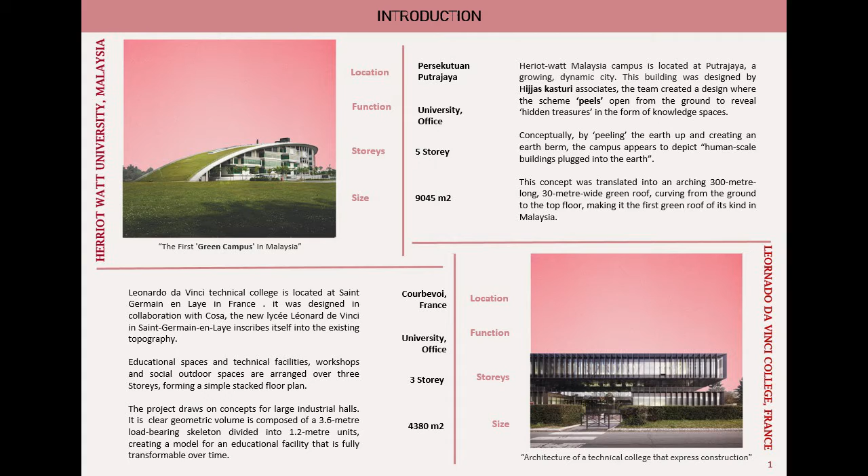Secondly is Leonardo da Vinci Technical College, located in Paris Saint-Germain, France with a temperate oceanic climate. It was designed in collaboration with COSA. The new Leonardo da Vinci in Saint-Germain inscribes itself into the existing topography and the architecture of the technical college that expresses constructions in mind.

Moving forward, I'll talk about the site planning analysis on the two buildings. The site planning analysis is based on the climatic analysis in their respective locations and how they utilize or avoid it. Firstly is the climatic analysis for Heriot-Watt University, having a tropical rainforest climate with an average 32 Celsius temperature all year round and an average 2,960 mm of rainfall per year. It is hot and humid throughout the year, peaking in May, with two monsoon seasons, May to September and October to March.

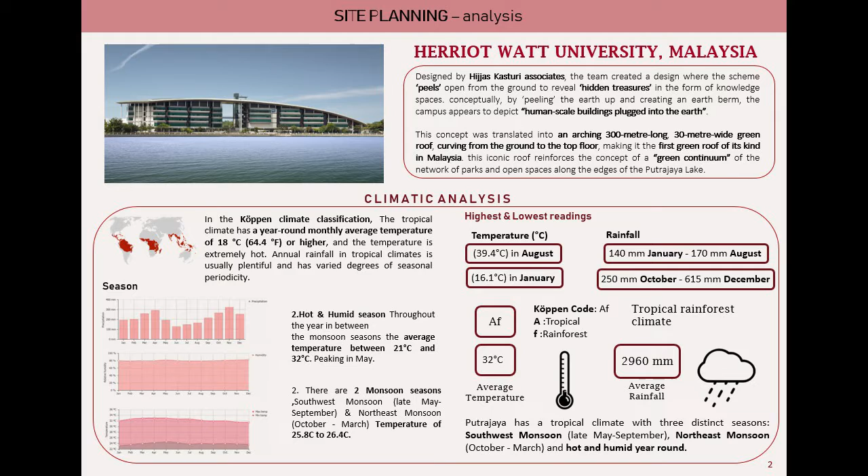An analysis of the site shows the building is responding to the solar radiation and sun glare at different times of the day, creating a systematic orientation where several clusters or spaces are divided to allow permeability and ventilation to pass through. For the solar response, the building is set into the topography to minimize the sun glare and direct heat gain, with placement of windows facing the north and south acting as a focal point and away from direct sunlight. They have also passively designed the facade orientation to allow enough light to penetrate through.

Next is the wind analysis. With prevailing winds very prominent from the south, the spatial planning of the building is oriented to maximize efficient ventilation, allowing as much wind as possible to pass through the building.

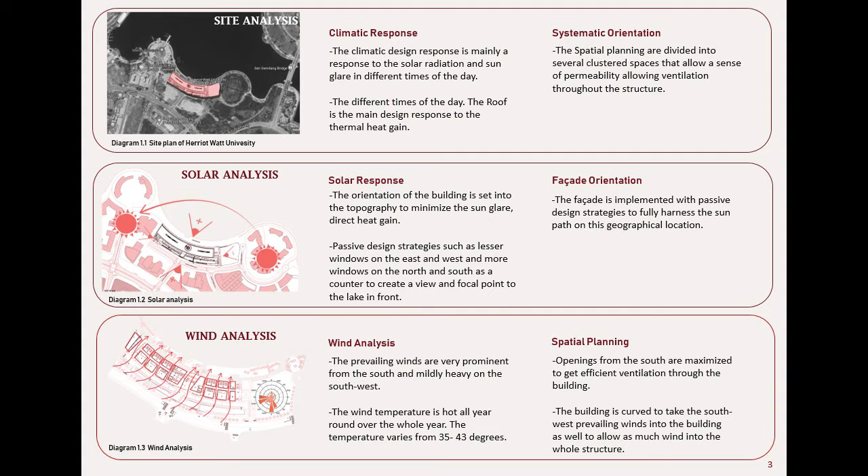Moving forward is the site planning analysis of Leonardo da Vinci Technical College, located in Paris Saint-Germain, France with a temperate oceanic climate, averaging temperatures of 22 Celsius and an annual rainfall of 99.2 mm. The climate generally features mild summers and cool but not cold winters. There are four seasons, with sunny weather in spring, March to May, and summer, June to August, with average temperatures between 26 Celsius and 39.4 Celsius. Chill weather is in autumn, September to December, and winter, January to February, with temperatures reaching as low as 16.1 Celsius.

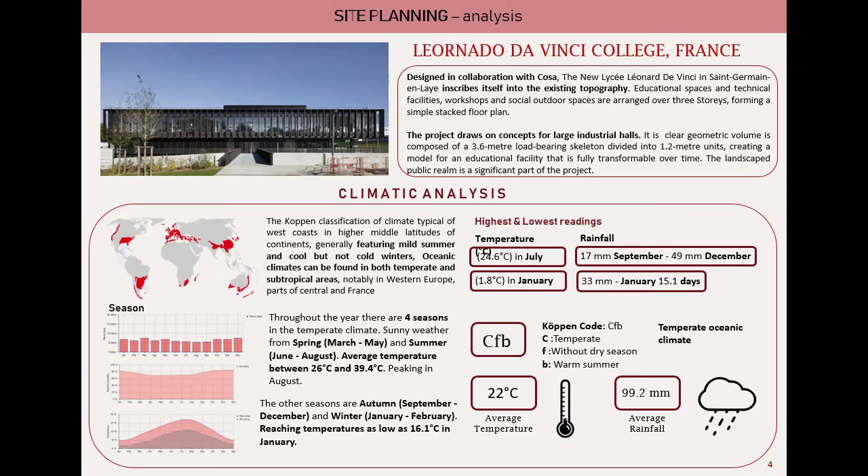The building is oriented in a way where it has to protect itself from the summer sun radiation and harness the winter sun efficiently to provide a comfortable environment where the students can study with natural sunlight and well ventilated areas. As for the solar response, the building is divided into floor segments having courtyards and openings allowing natural light. The facade is oriented so that each of the educational spaces, technical facilities, workshops, and social outdoor spaces gets plenty of sunlight, either reducing the summer heat or harnessing the winter sun for heat efficiently.

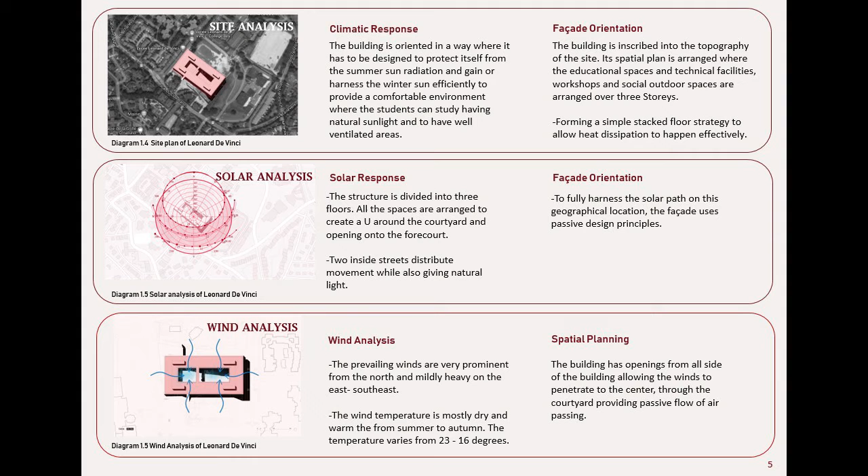Next is the prevailing winds that come from the north and mildly heavy on the east-southeast, and are mostly dry and warm. The building has openings from all sides, allowing the winds to penetrate to the center through the courtyards, providing passive flow of air.

Finally, we can compare the two buildings. Firstly is Heriot-Watt University. The architect has taken into consideration the overwhelming heat from the sun. The open facades of the building face the north and south, reducing the thermal heat and sun glare while providing enough sunlight to illuminate the spaces in the university. As for the user experience, the university mainly uses active cooling in each of the spaces, in combination with how the open facades in each space are oriented to avoid the intense heat into the rooms, creating an overall comfortable environment.

Secondly is Leonardo da Vinci Technical College. The amount of west-facing windows isn't overwhelming and they're well shaded to keep things cool. The light shines brightest on west-facing walls during the hottest part of the day, and the building is oriented to bring in winter sun while keeping out the hot summer rays. As for the user experience, the students are provided with a comfortable environment for studies due to plenty of light penetration into the classrooms and harnessing the available heat from the sun during winter.

In conclusion, the two educational buildings have different methods and reasons for their site planning based on their climatic advantages and disadvantages. Heriot-Watt University is oriented to minimize heat gain from the sun, forming stack spaces to allow continuous wind flow through the building. Leonardo da Vinci Technical College is oriented to gain heat from the sun in winter and protect the spaces from the summer heat while still allowing plenty of illumination in the spaces.

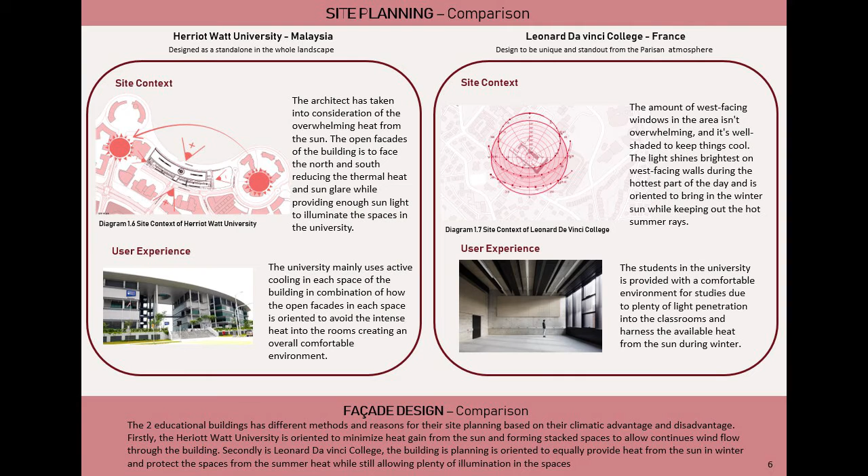For daylighting, the Heriot-Watt University is oriented towards north and south, allowing less direct solar radiation towards the building envelope and reducing the heat build-up in the building. There are various passive design strategies incorporated by the university, such as using the light well and skylight to bring in natural light into the interior of the building.

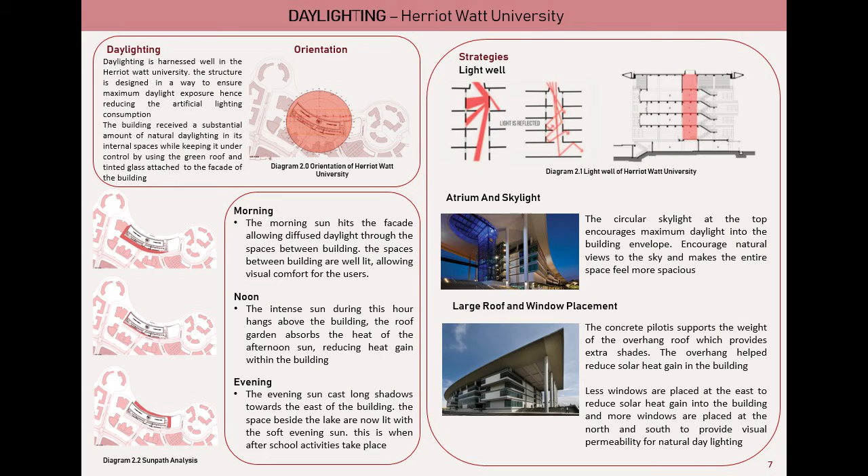By using the light well, they can reduce the electric lighting requirements of the building, as well as provide an open space that can be used as an outdoor area. The building also uses a large green roof to provide extra shade and help reduce solar heat gain of the building, and it is also used as a rainwater buffer, purifies the air, reduces ambient temperature, regulates the indoor temperature, saves energy, and encourages biodiversity in the city.

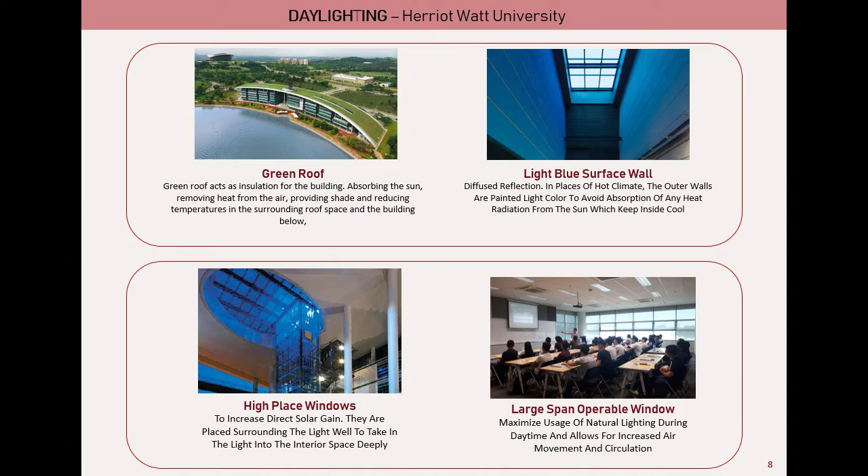Lastly, this building has a lot of large span operable windows that help maximize usage of natural lighting during daytime and allow the users to work and continue their activities productively. Next, the Leonardo da Vinci Technical College is oriented towards the northwest and southeast to ensure maximum daylight exposure, hence reducing artificial lighting consumption.

This university incorporates multiple passive design strategies. This includes dark color exterior facades, blades and louvers to invite soft diffuse lighting into the building as well as to reduce glare that could affect the visual comfort of the occupants. A light color building interior helps to capture sunlight within the building so that the spaces are well lit during the day.

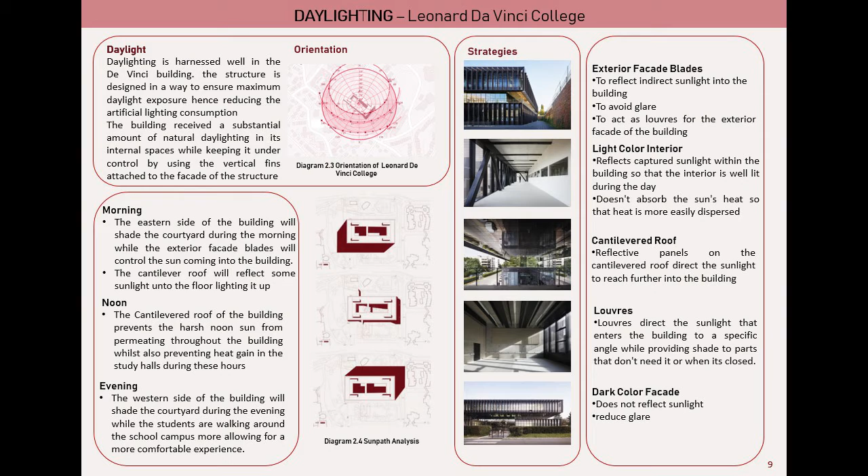Other than that, this building uses a large cantilevered roof with reflective panels attached to it to invite more sunlight to reach further into the building, brighten up the interior spaces and allow users to work effectively.

Finally, if we compare the two, Heriot-Watt University is located in a tropical climate with strong sunshine throughout the year. Hence, the design focuses more on diffusing the sunlight. This is to ensure that the building obtains maximum natural lighting while also ensuring the spaces do not heat up. On the other hand, Leonardo da Vinci Technical College is located in a temperate climate, so the design focuses on maximizing natural sunlight as there is not much solar radiance.

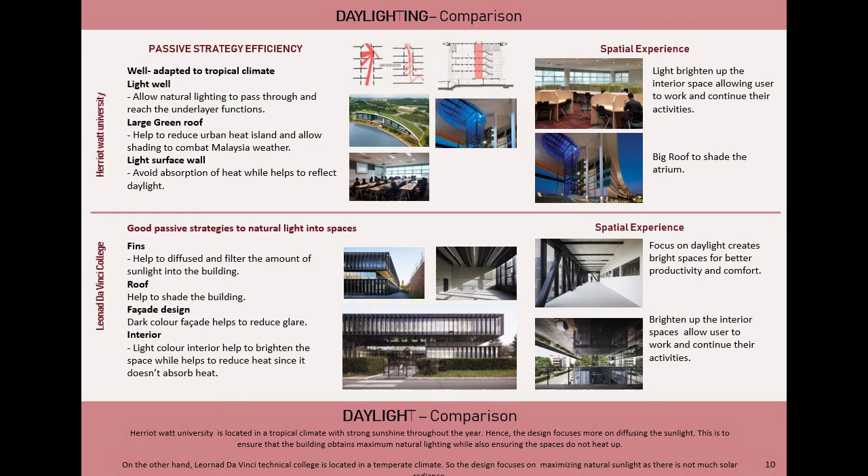Now, if we move into the facade design analysis of each building, firstly is Heriot-Watt, where for the facade orientation, the building is positioned in front of the lake for passive cooling. Windows are also fewer on the east and west sides of the building. Furthermore, the building takes on the form of the curvature of the waterfront, as there are more openings facing north and south towards the lake for vistas and cooling purposes.

The building envelope consists mainly of raw precast concrete columns, and the walls make up the structural facade, whereby the columns are used as a support for the overall structure. White coat paint is used to lower the heat absorption within the building. Precast concrete walls are also used to have a modular system as they are arranged on the site.

Moreover, the concrete provides good thermal insulation in a hot tropical climate, which moves us into the thermal insulation of the building, where there are open spaces to allow heat transfer during the night. And the green roof is a catalyst, as during the day the sun's heat is trapped in the roof facade, and at night the trapped heat in the green roof and walls is released into the environment.

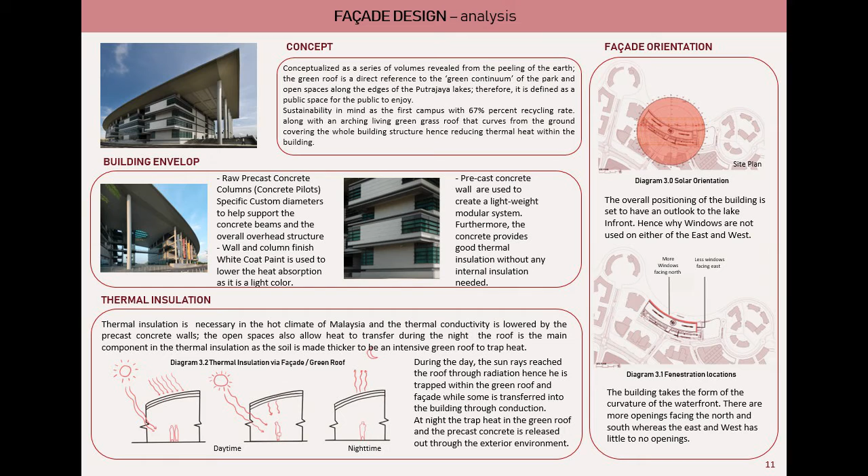Aluminium frame walls are used as a fenestration system to maximize the area coverage to let in as much light as possible. Low-E tinted glass is used in the curtain walls as it reduces the amount of heat loss by reflecting heat energy. So if you look into the facade design, the fenestration orientation is that the curtain walls are maximized on the north and south and less on the east and west.

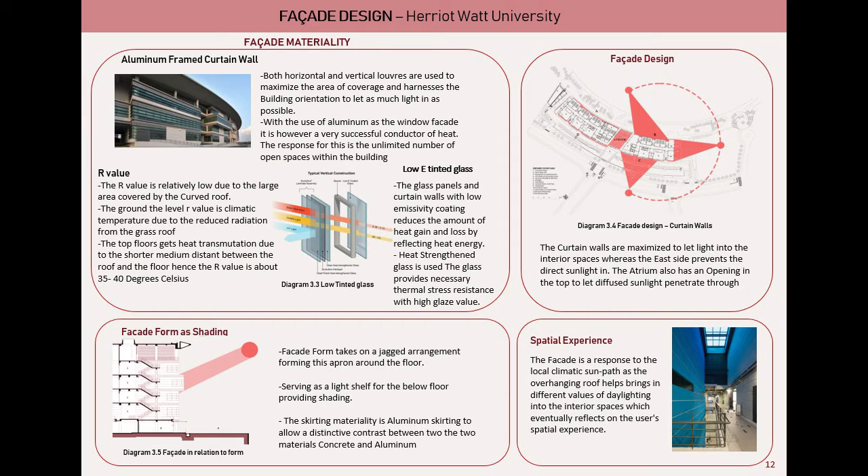The atrium on the roof allows diffuse sunlight to pass into the open space in the middle. The overall building design form takes a jagged arrangement in the modular form, as the upper floor acts as a shading system for the floor below in the form of a building apron.

Looking into the Leonardo da Vinci College, the college takes an open glazed facade concept and diffuses sunlight into the secondary spaces while avoiding direct sunlight, which is why the need for active daylighting is reduced greatly.

Looking into the building envelope, the components that make up the facade are the exterior facade, blades to cast shade from the sun's rays at various angles, narrow maintenance balconies on the upper floor, and reinforced tall glass in the basement level. A steel-framed exposed exoskeleton is used as a rigid form to create a uniform distribution of the facade openings, giving a repetitive system for genuine modular flexibility as well.

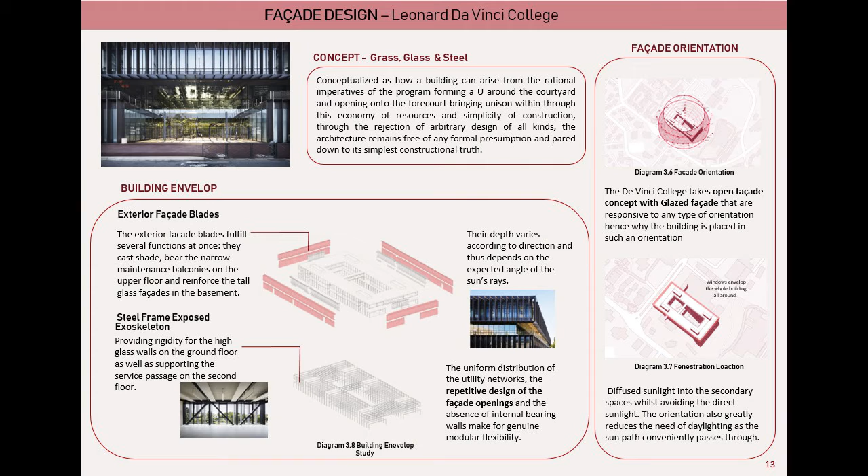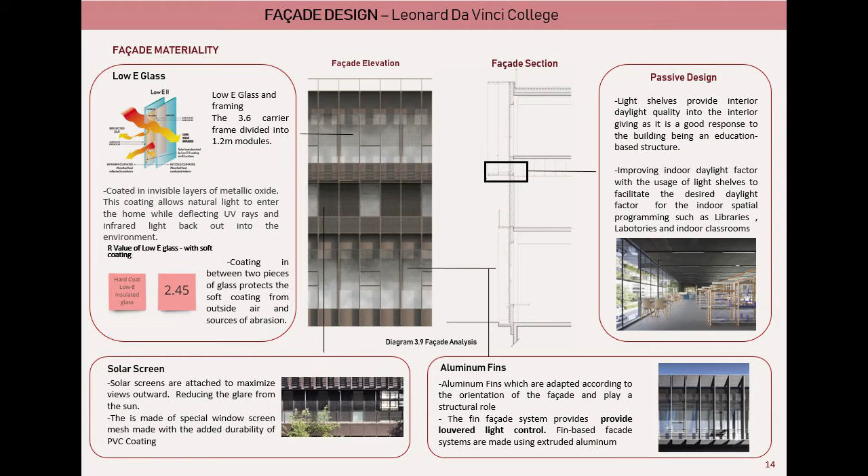If we look deeper into the facade design, solar screens are used to reduce glare from the sun on the first floor, made of mesh with PVC coating. Aluminium fins adapt and provide louvered light control within the system as a whole. Light shelves are also used as a passive design strategy to provide the daylight factor necessary for the different functions in the space.

Finally, if we compare the two buildings, Heriot Watt is designed to decrease the usage of active cooling with the idea of open facade and plan. However, Leonardo da Vinci College is to bring unity with its simplicity in facade design.

The spatial experience differs significantly, whereby the curtain wall lets light into the spaces, giving a bigger feel to the space, making it less cramped. On the contrary, the Leonardo da Vinci creates a sense of dialogue and transition between the indoor and outdoor realms with a hint of modernism as well.

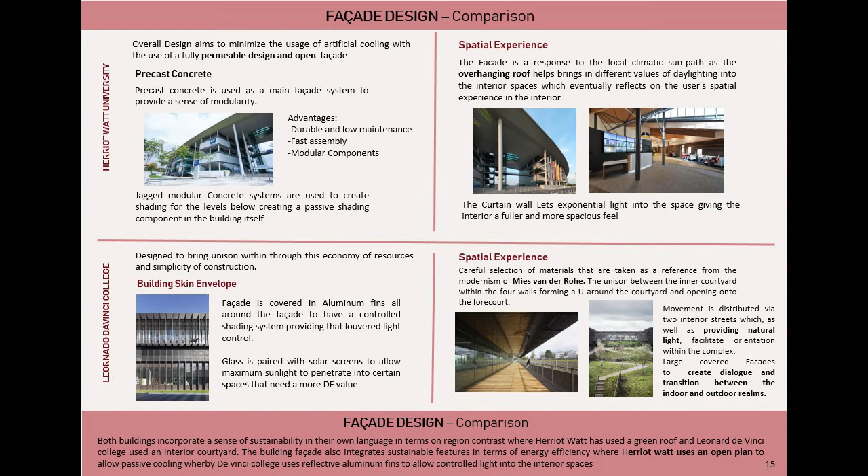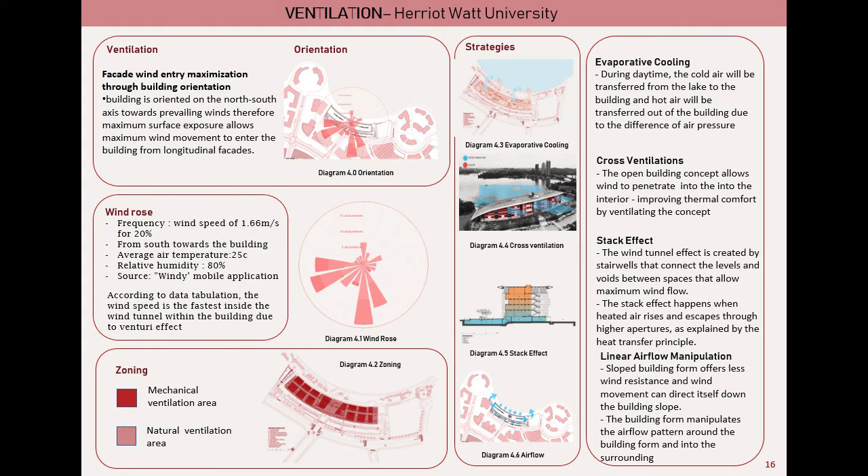For ventilation, the wind rose states that the wind is the strongest coming from the south, southwest, and west side. The Heriot Watt University is oriented on the north-south axis, allowing the moving winds to blow through it. The passive ventilation strategies incorporated by the university include using the lake to allow for the cold air from it to passively cool down the building while transferring the heat to the lake. The building design allows for wind to blow into the interior and outside, allowing cross-ventilation to take effect.

The wind tunnel effect, created by the stairwells, allows for maximum wind flow, making it so that the hot air that rises from the bottom of the building will exit when it gets to a higher point. The sloped form of the building offers less resistance to the wind, and the design ensures wind to flow around and into the building.

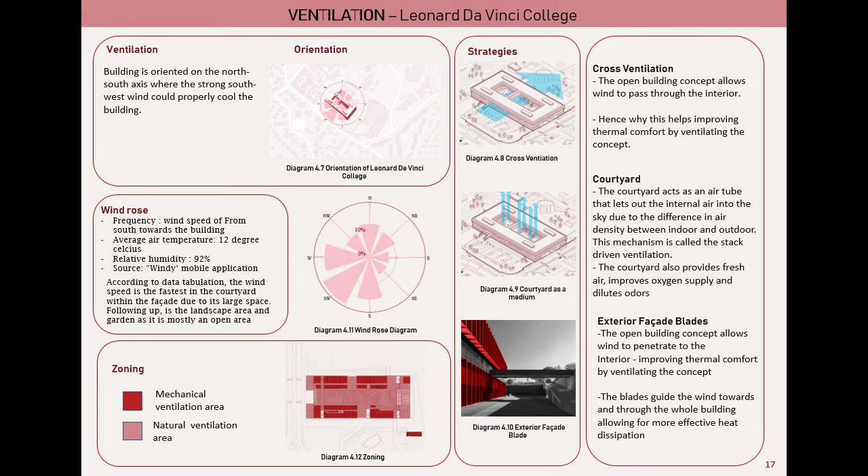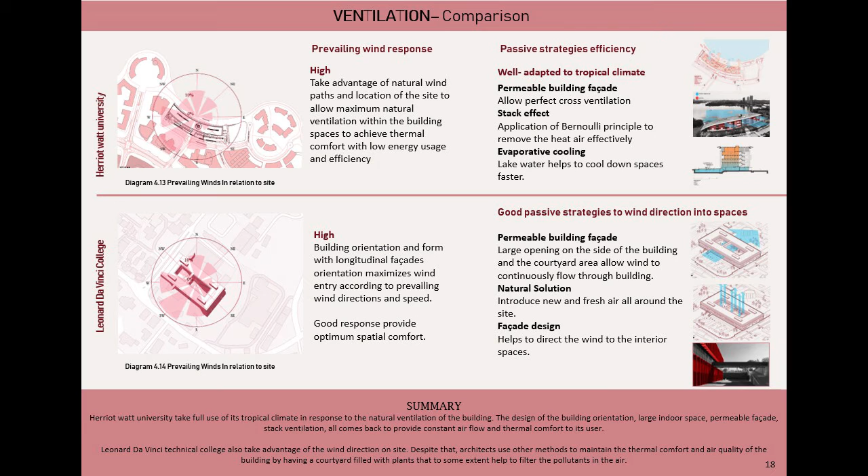If we compare the two, Heriot Watt University focuses on using its position to achieve maximum natural cooling by placing the building next to a lake, and forming it so that the facade of the building is able to guide the strong winds around and into it, while the Leonardo da Vinci Technical College uses its facade and interior as a way to manipulate airflow into and out of the building by designing facade blades and making the building mostly opened up.

With regards to strategic landscaping, the Heriot Watt University has four main benefits from its location. Water management is one of the four benefits and helps the building redirect rainwater which falls on its roof to the lake, which is a water recycling process. This is done with the integration of the green roof as part of the landscape. Speaking of the roof, the artificial addition to the landscape helps with a lot of heat reduction to the site, creating a cool atmosphere throughout the building.

Then we have the natural noise control, which is allowed by the immediate environment. The lack of buildings in the vicinity and the abundance of empty land and trees makes sure that the sound waves which travel towards the building are slowly reduced. Last but not least, the glare and heat reflected from the lake is interrupted by a line of trees that stand in between the lake and the university. It basically acts as a natural buffer.

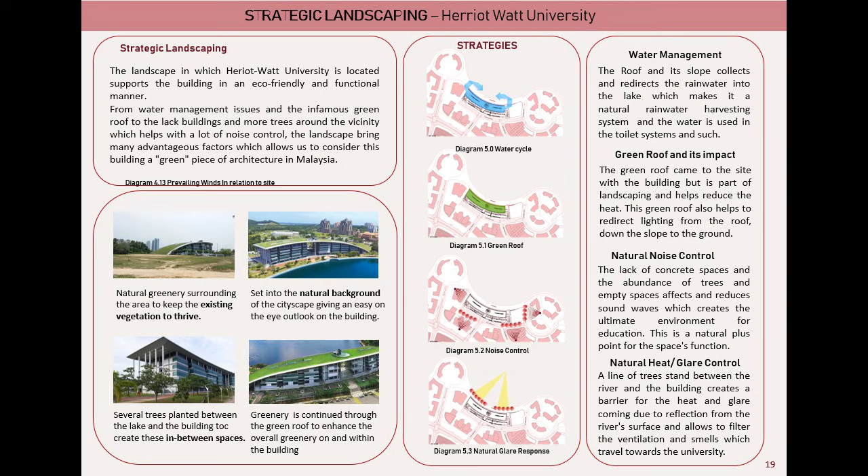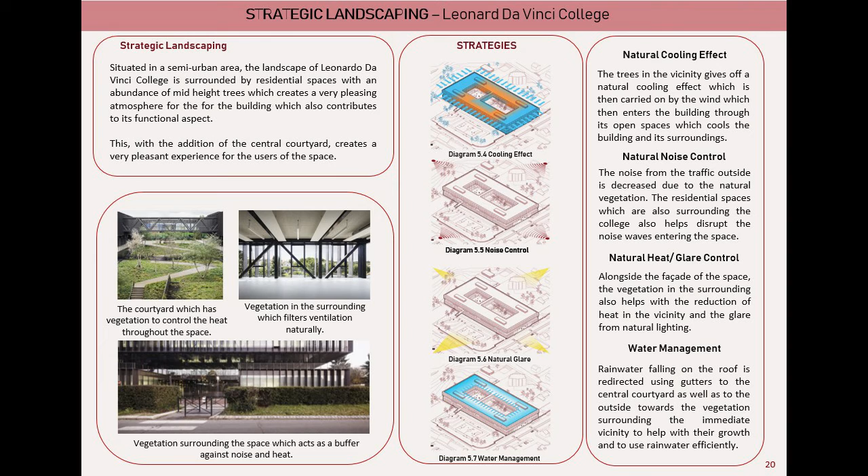Moving on to the Leonardo da Vinci College, this design is in the middle of a semi-urban area. There is a natural cooling system which uses the vegetation in the environment surrounding the building to cool off the atmosphere as well as the building. The same vegetation is also used to cull down the noise from the traffic around the design. Then there is the vegetation introduced by the designers to control and to filter the ventilation which enters through the building's facade and open areas. And the design manages rainwater falling on the roof by redirecting the water to the plants in the central courtyard.

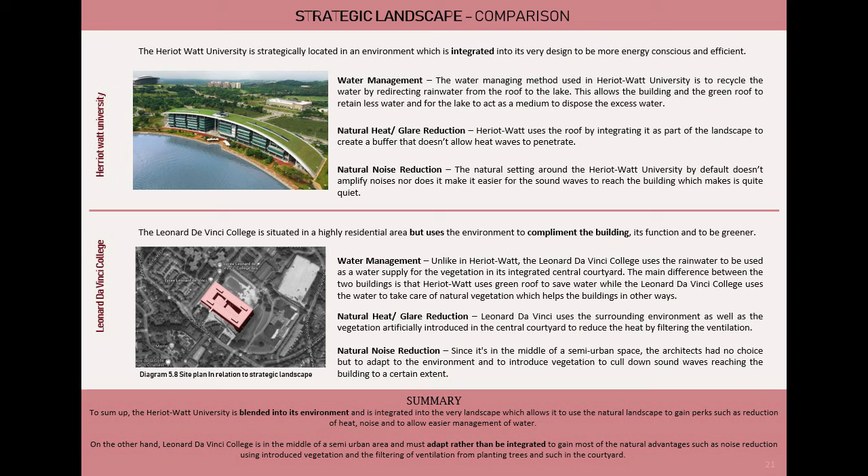Unlike the Heriot Watt University, the Leonardo da Vinci College uses the building and vegetation introduced artificially to adapt to its environment. To sum up the strategic landscaping in one sentence, Heriot Watt becomes part of the landscape and gets access to the benefits, while Leonardo da Vinci College has to adapt and adjust to the landscape to get some benefits.

In conclusion, these two structures of the 21st century use unique and imaginative sustainable responsive design in both tropical and temperate regions. Both structures can benefit from passive green methods, such as landscaping, building orientations, and facade, among others. With the right green measures in place, both buildings may achieve high efficiency and energy conservation. As a result, the building's carbon footprint will be lowered, and the environment will be maintained cleaner and greener by producing less trash and reducing dangerous gas emissions.

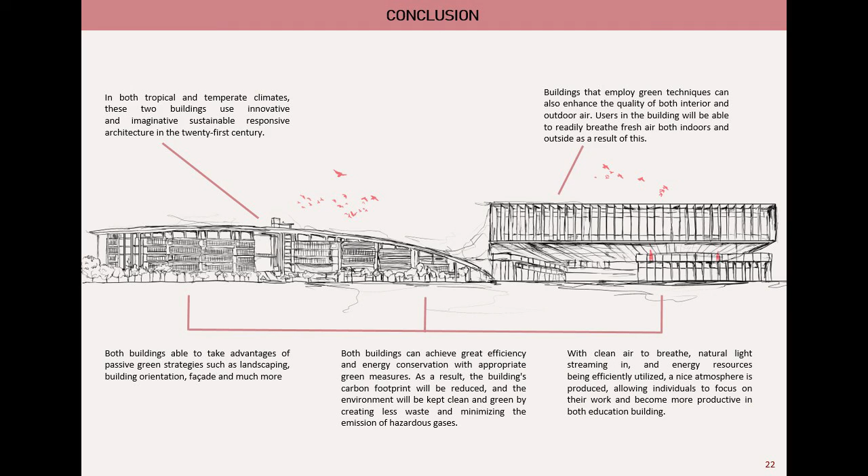Green construction approaches can improve the quality of both the indoor and outdoor air. As a result, users in the building will be able to breathe fresh air easily both inside and outside. With clean air to breathe, natural light, and efficient use of energy resources, a comfortable atmosphere is created that allows people to focus on their work and be more productive in education.